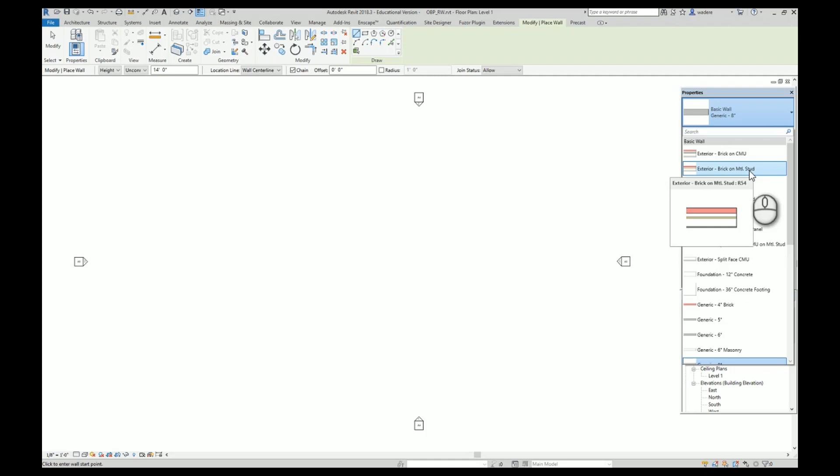The next one is brick on metal stud. This is probably the wall that most of you want to start with, unless you plan on doing some type of metal paneling or something like that on the exterior. In either case, as long as you pick an exterior wall to start with, we can adjust what the exterior finish is at a later time.

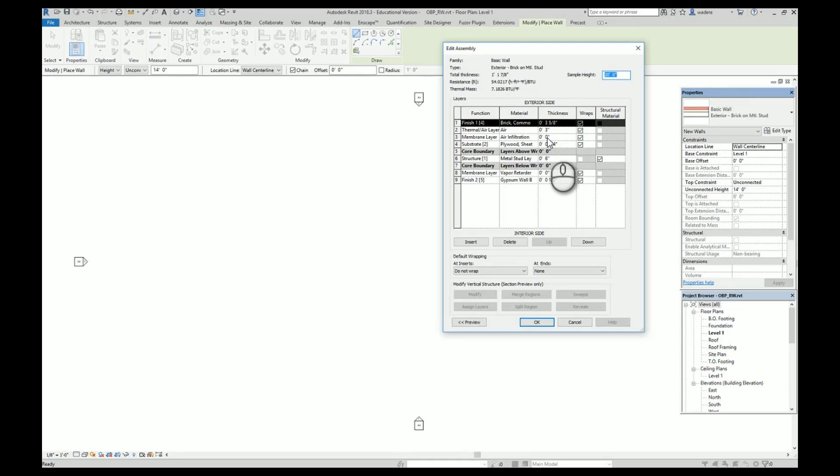So let's look at the construction of this wall. If we go into it and hit structure, you can see that we have brick on the outside, that's 3 5/8. We have an air barrier of 3 inches. We have our membrane layer, the air infiltration, which does not show any thickness because it's a very, very thin sheet of material. Then we have our sheathing, our exterior sheathing. This one in this case is plywood.

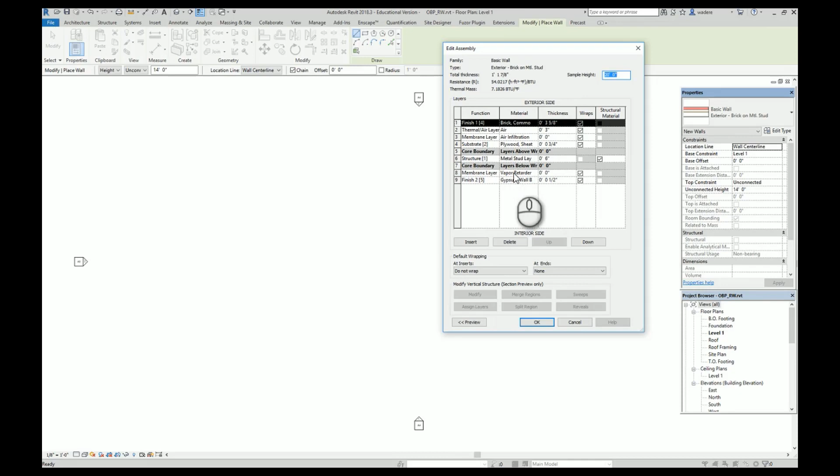It could be some type of a gypsum board, just as long as it's an exterior rated material. And then you'll see the actual structural component of the wall, which is the 6-inch metal stud, which is what we want. You'll notice it has a core boundary on each side. This is just part of the way that the wall is set up. The core boundary is typically on each side of the structural component of the wall.

And then to the interior, we have a vapor retarder, which basically is a sheet of plastic. Again, it's very, very thin, so it does not show any thickness here. And then on the gypsum wall board, in this case it has 1/2 inch. In most cases, we typically in commercial construction always use 5/8 inch.

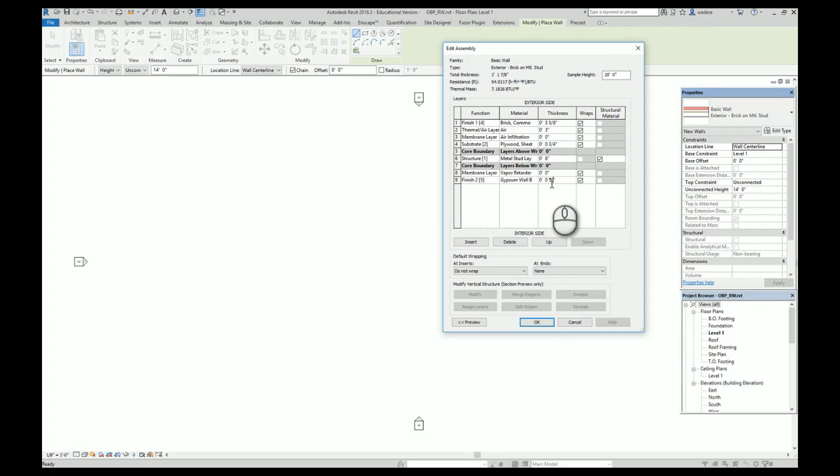So I'm going to go ahead and change that so that it is the correct wall type. And you'll notice when I did that, it actually changed the total thickness of the wall. And I'm going to say okay.

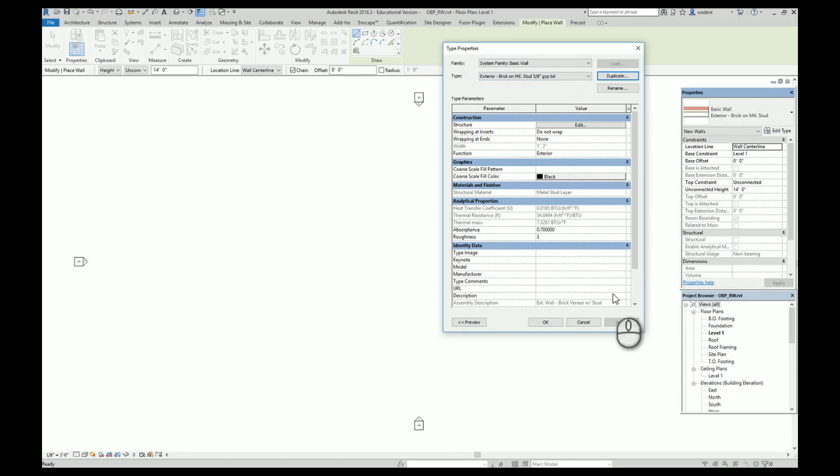And then I want to duplicate this or go back to that original wall type. So I'm going to do this by adding 5/8 inch gypsum board on there so that I know that that is the wall that I changed. And I'm going to say okay. You can see the name has changed. And I'm going to say okay.

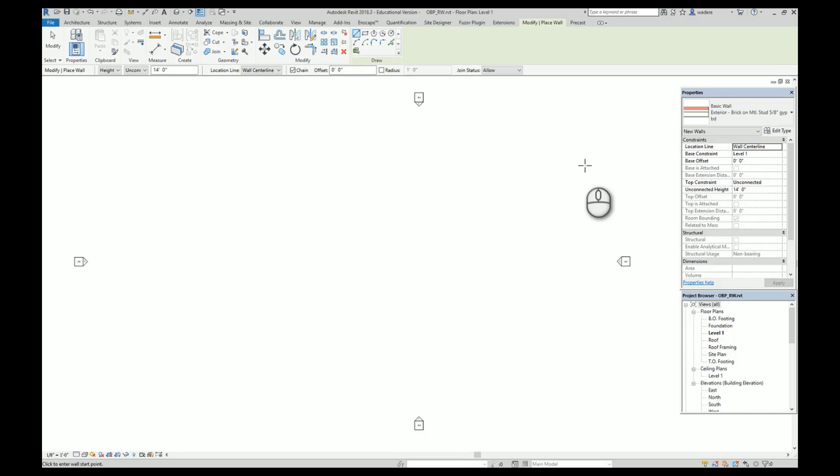I do want to caution you not to use a generic wall. In my courses, I don't allow you to use generic walls. Even though you may think generic wall is okay to start with, please don't use one. Once you decide on your exterior wall, I can help you create it. If it's something different, we can always go back and change it.

The next part before we begin to draw is you do need to set up a structural grid system. You are going to use a W12 by 53. I have set up some requirements as far as the spacing, and this is a little bit flexible. I have set up a maximum column spacing of 30 feet and a minimum column spacing of 15 feet.

What I want to see is equal spacings throughout most of it. What we try to do is keep all of our structural members the same sizes. It makes it much simpler to construct. It makes it more economical to be able to do that. So once you start laying out the building, you want to make sure that you set that up correctly.

As you are laying out your grid system, you need to make sure that it has good dimensions. And what I mean by good dimensions is it's nice if it can be rounded to like feet, like 20 feet, 21 feet, 22 feet.

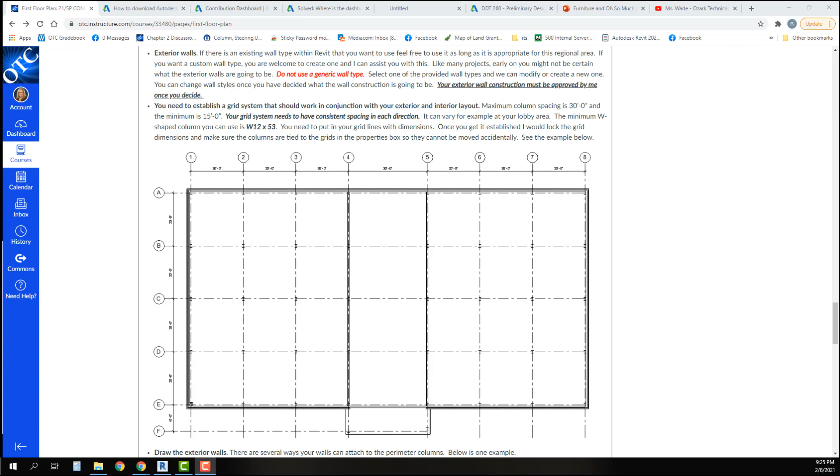But especially if you can't do that, make sure it's at least a full inch. Don't do 21 feet, 1.5 inches. You want to be very consistent and you want to have good numbers.

So we know the building itself from our original project has some certain dimensions. I've shown an example here in the assignment of one way to lay it out. You'll notice that my column spacing is 20 feet, 20 feet, 20 feet, and then I actually have 30 feet for my core. Then I have 20 feet, 20 feet, 20 feet. And then I have 20 feet here, and then I have 10 foot for my vestibule.

I would also need some sort of a vestibule here at the back of the building. It could be inside, it could be outside. So it might be simplest if you kind of know the basic dimensions of your building to lay out your grid system first.

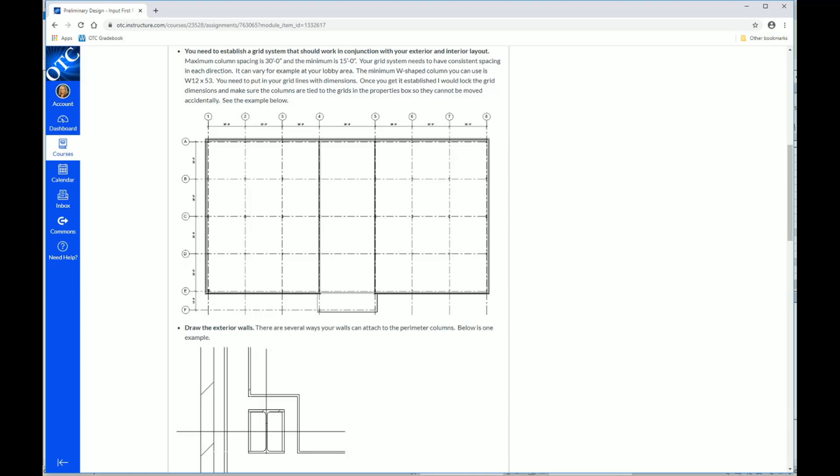So how we would go about doing that is if I go to my structure tab and I go to column, you'll see that over here I have some columns in here, okay, but I may not have the one that I want. So in this case I've asked you to use a 12 by 53.

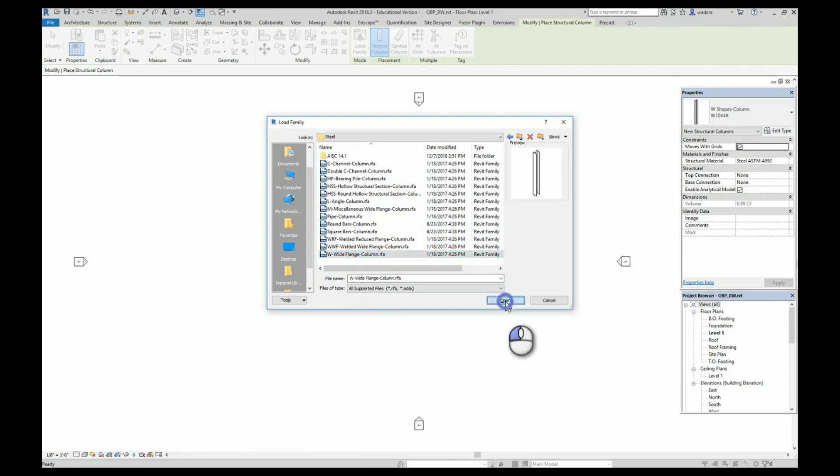So I'm going to go to load family, and I'm going to scroll down to structural columns, and I'm going to go with steel, and I'm going to do the wide flange column at the bottom, and I'm going to say open. And then you see it's going to give me all of my choices. They are in numerical order with the first part of it, and I wanted a 12 by 53. So if I come down here and pick on that and say OK, now I have my column.

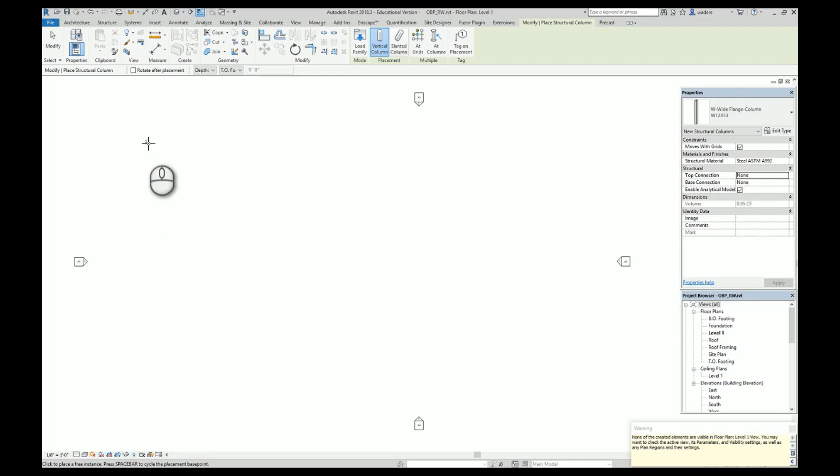I'm just going to place one to begin with. Now you'll notice it does not show up. If I go to my 3D view...

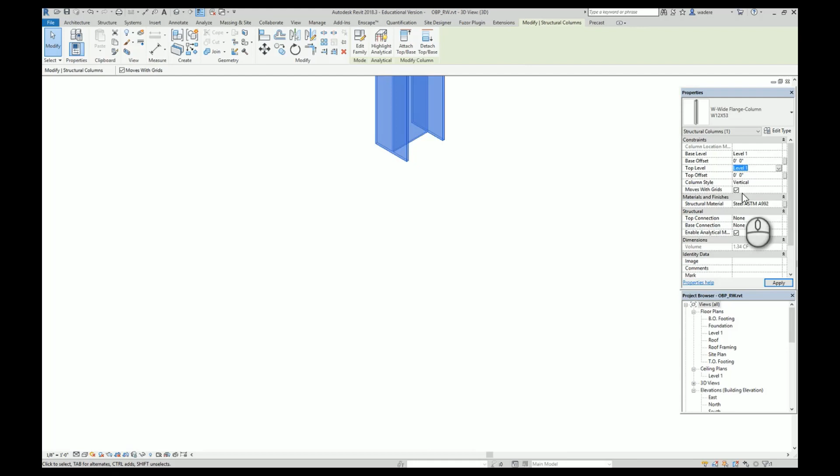There is my column. I'm going to click on that column, and I'm going to set the base level, and I apologize, my little notes are off on my other screen. I am going to set my base level to level 1, and I'm going to set the top level to roof, and I'm going to hit apply. Now if I go back to my level 1 plan, I can now see my column.

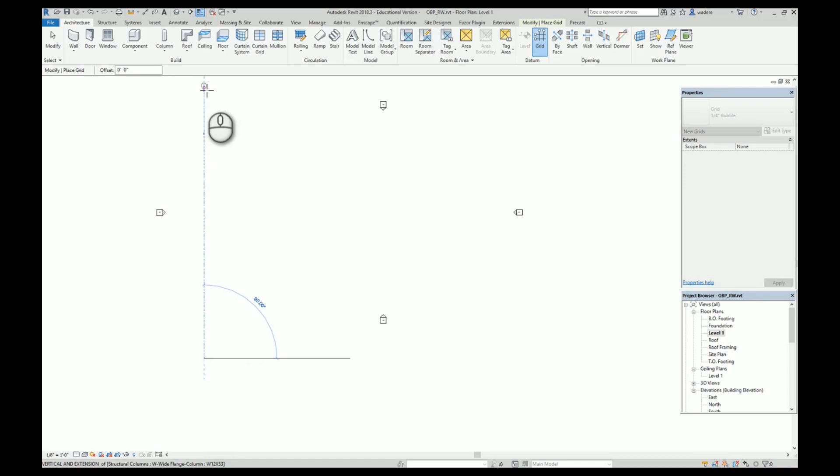What I'm going to do at this point is I'm going to go ahead and start with my grid. I'm going to go to my grids, and I'm going to align this with that first column, and I'm going to bring that up.

And then I'm going to do another grid from the bottom and come over 20 feet and go up. Do another grid 20 feet and go up, and do one more grid at 20 feet and go up. Then I'm going to do one at 30 feet because this is going to be my lobby and core area.

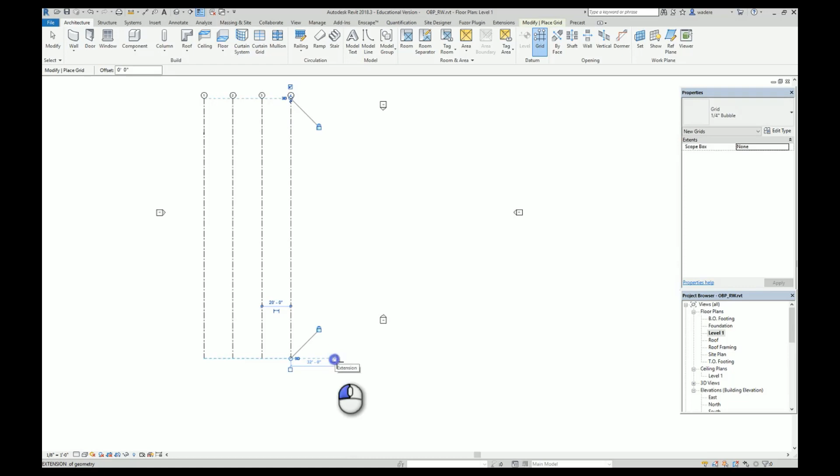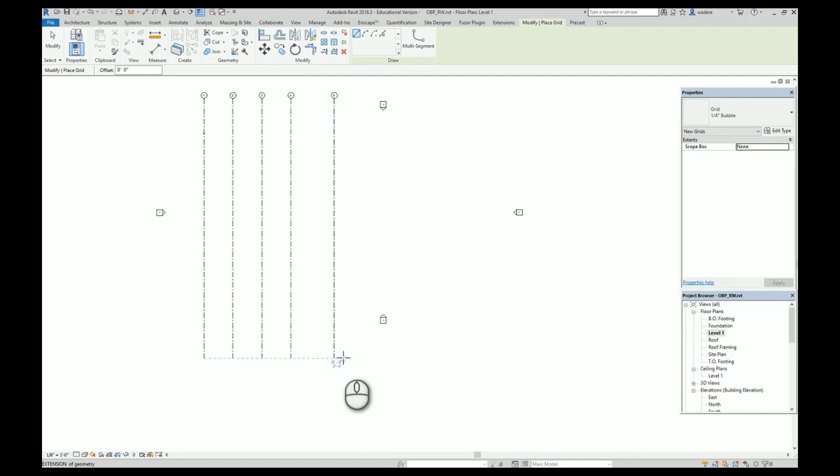So I can adjust this by just clicking on that grid and changing this to 30 feet. And then I'm going to continue by adding my other grids at 20 feet. And then adding the other grid at 20 feet. And then adding another grid at 20 feet.

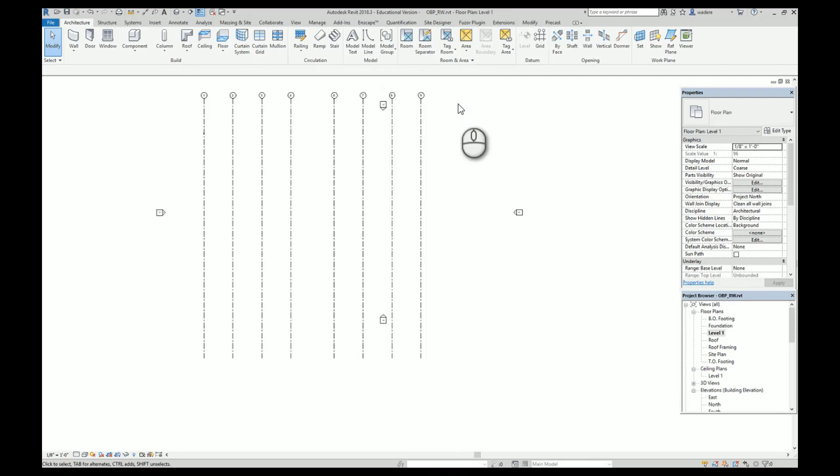So now it will make it much easier for me to lay out my columns. So I need to go in the other direction. So again, I'm going to add my grid, and I'm going to come off of that column, and I'm going to go this direction.

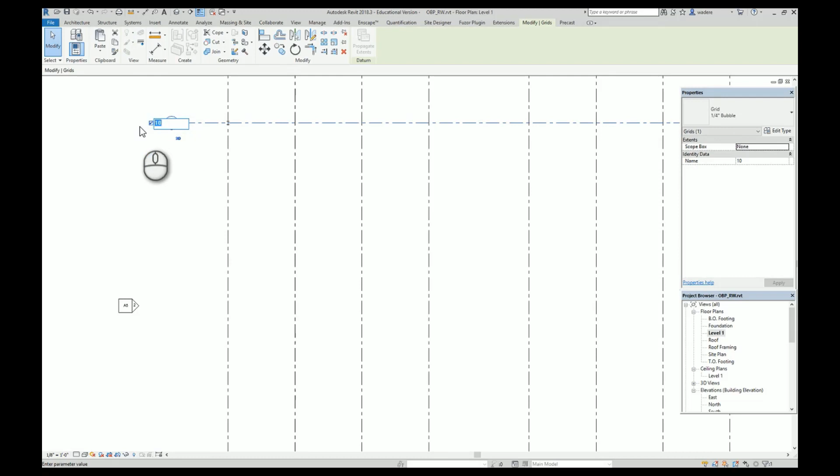And the first thing I'm going to do is I'm going to change this to an A, because I want to go A, B, C, D, that direction. So I'm going to go ahead and continue to add these at 20 feet. And again, I can get my alignment lines.

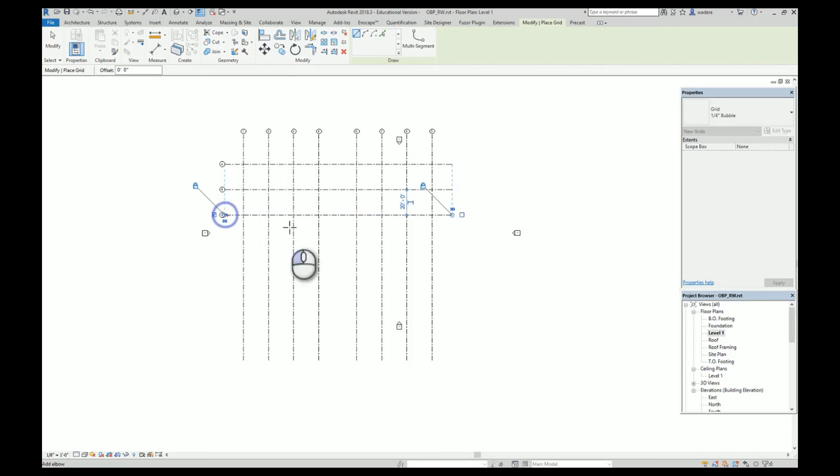I suggest that you do not copy grid lines. Revit doesn't like that. It doesn't like to work very well that way.

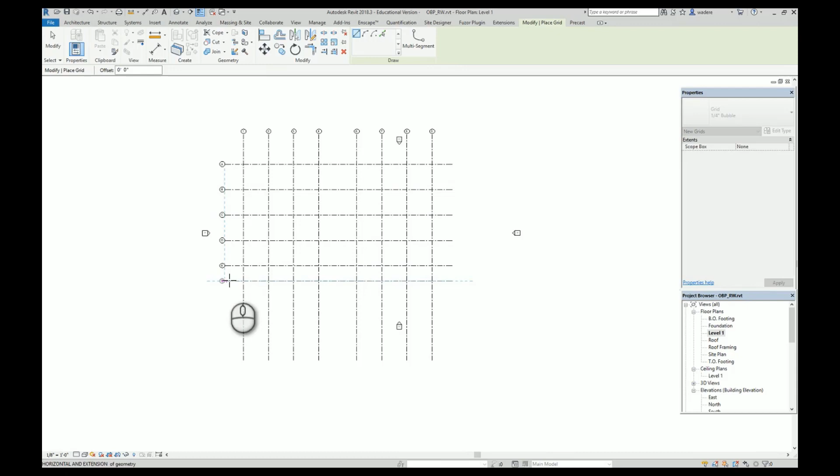And then I'm going to do one at 10 feet for my vestibule. Actually, I'm going to do 12 feet because that's what it's liking better.

Now I kind of have an idea of where the perimeter of my building is. So I want to grab these grid lines and pull them down below my elevation marker. If I don't do that, when I go to my elevation, I'm not going to see those grid lines, and I want that to happen.

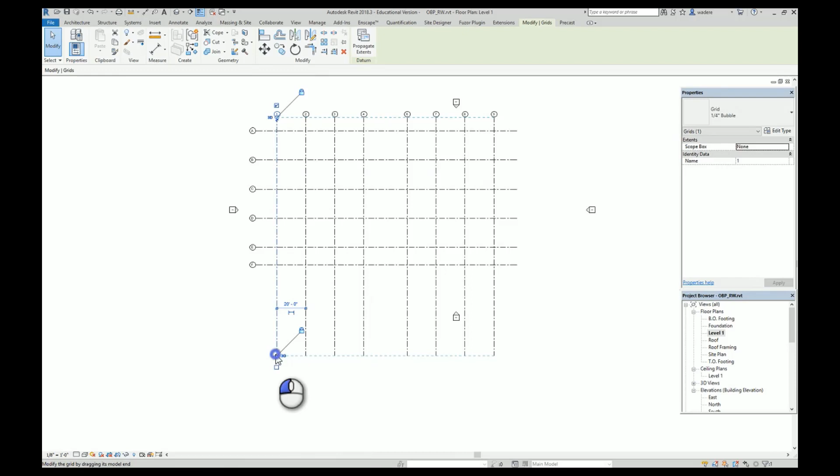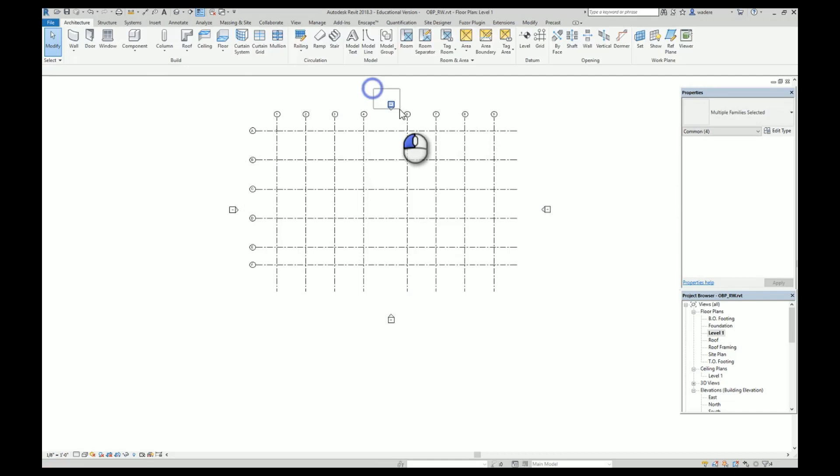This one again is pretty far out here. So if I just grab this little circle and pull it up, I can pull it up like that. And then this one, I'm going to move over closer. This one, hold down the control key, move these over more in the middle, and that way I have all of my grids covered. So now what I can do is I can place the rest of my columns very easily.

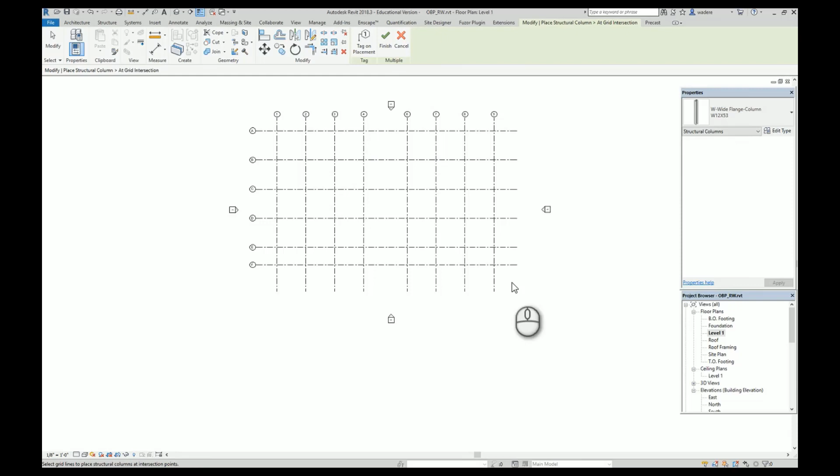Right here, I have something that says at grids. So the first thing I'm going to do is remove that column that I put in. And I'm going to do my column at grids. Again, I've already got my 12 by 53 selected. So if I just window on all of my grids and click on the check mark, you'll see it placed all of my columns.

I get a warning down here because it says it can't see them. And again, I need to go back to here, to my 3D view.

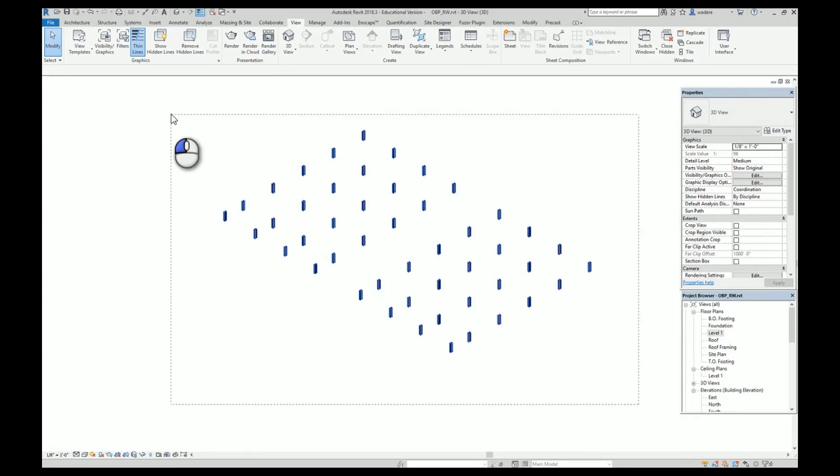And I'm going to zoom out and select all of my columns. I'm going to set the top level to roof. Again, I apologize, my little box is off on my other screen. And I'm going to set the base level to level 1.

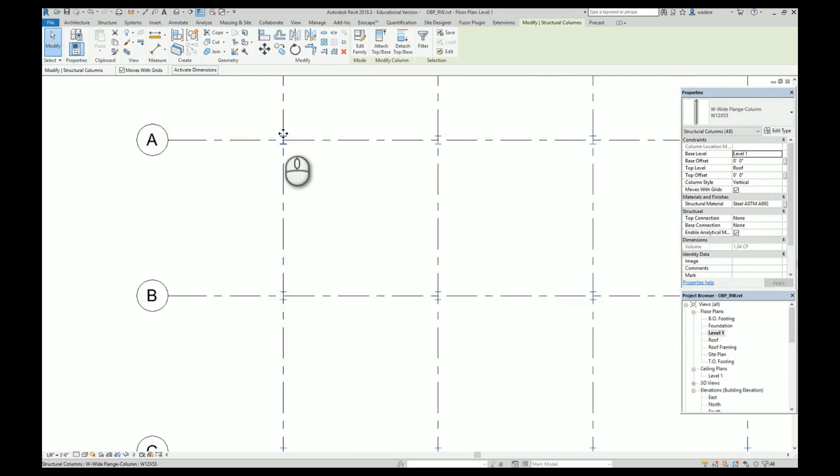So now when I go back to my level 1 plan, I should be able to see all of my columns. Now again, it's important, I feel, that down here at the bottom you set your setting to fine so that you can see the actual thicknesses of everything. It makes it much, much easier to work with.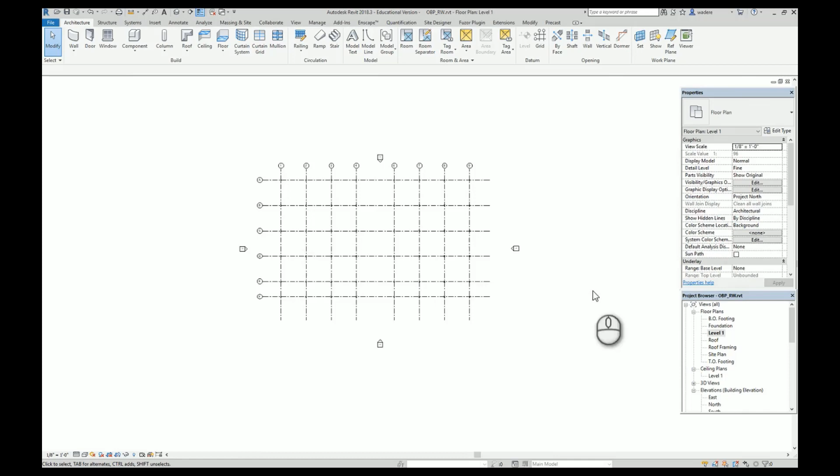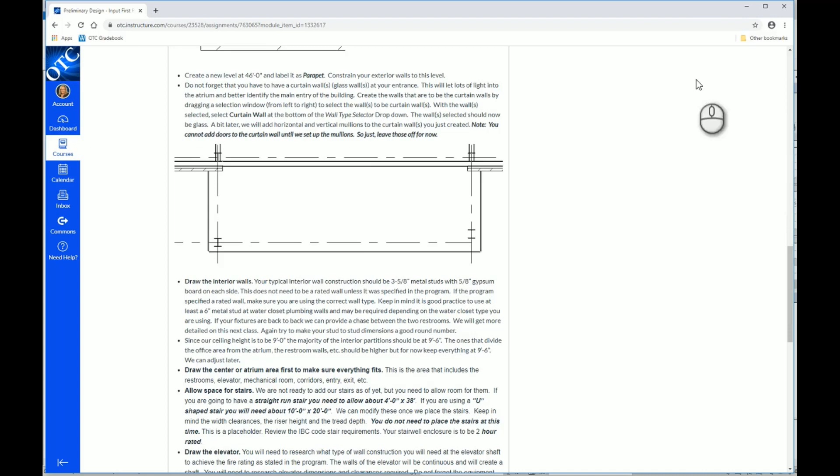Now that I have my grids in place and my columns in place, I can start putting in my exterior walls. One thing that I want to do is, if you read through the assignment here, I've asked you to create a new level called parapet, because we want our exterior walls to go to the parapet. If you're not familiar with what a parapet is, you need to look that up.

A parapet is basically a fake wall that comes up above the roof. It helps to hide stuff that's on the roof. It also keeps people from falling off of the roof. If you don't have that, in most cases you have to have some sort of fencing. So a parapet is something that you will have on your building, because more than likely you will have a flat roof. I want your parapet to be at least 4 feet above your roof line.

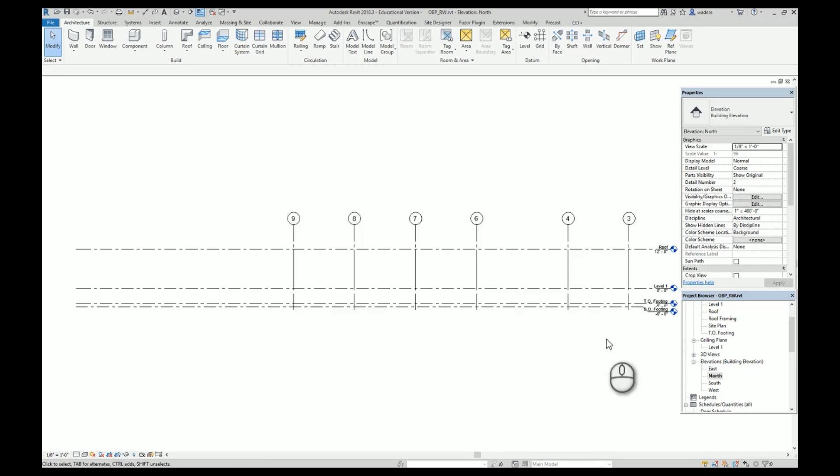So we're going to go into our elevation. And I just picked the north one, and right now you see you have a footing and a bottom of footing. We are not going to do footings on this project. So if you want to select those and hit delete, those will be deleted. You'll notice they also deleted out of your floor plans.

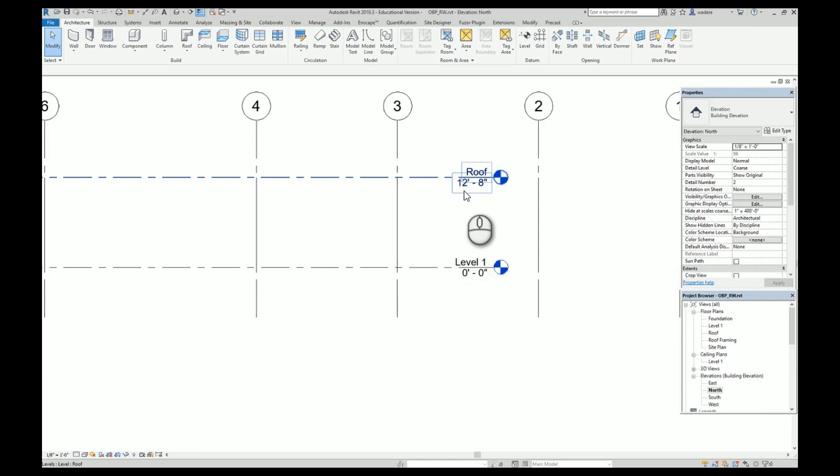I want you to change your roof height to be 42 feet.

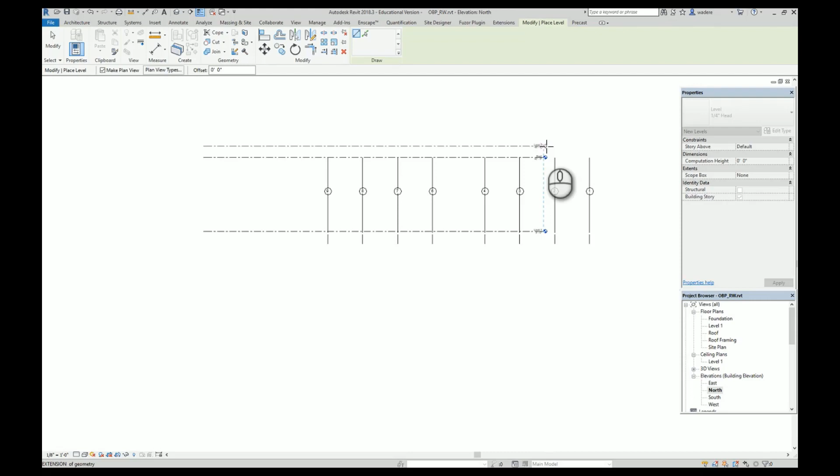Then we need to add another level, and we can do that under the Architecture tab. We're going to go up about 4 feet. I'm not going to worry about that. I'm just going to get it on there, and then I can come back in and change it. I'm going to call this parapet, and I want it to be at 46 feet.

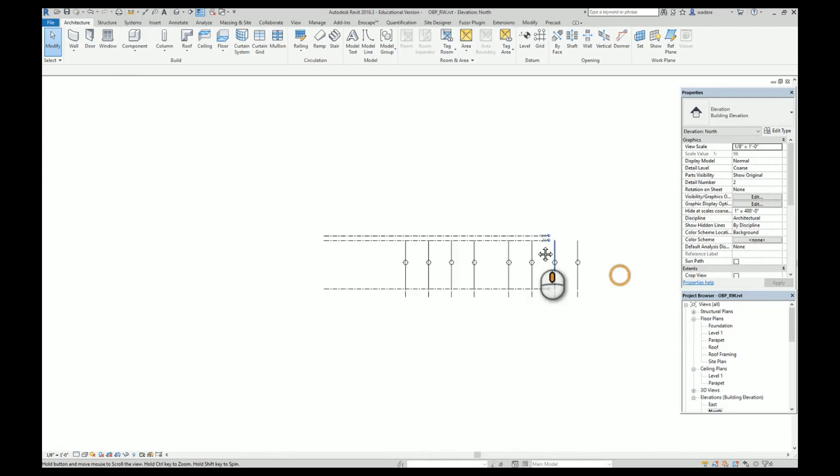Now, a couple of things I need to do. You can see my level lines are outside of my grid lines. So if I take these and just move them over, okay, and then I want to take my grid line and move it up past my building so that I have something that looks like that.

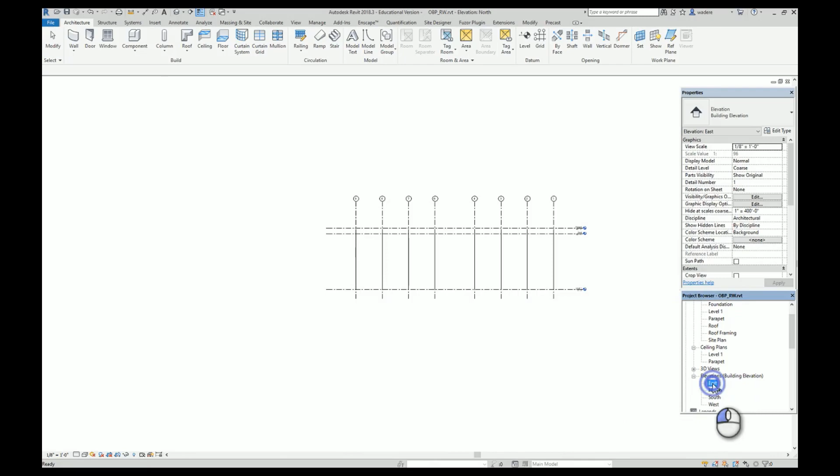And I will need to do that on each of my elevations. So again, I just click on this grid line and grab the bubble and pull it up. And in this case, I'm far enough outside my building over here. I don't need to make any adjustments. Go to my south.

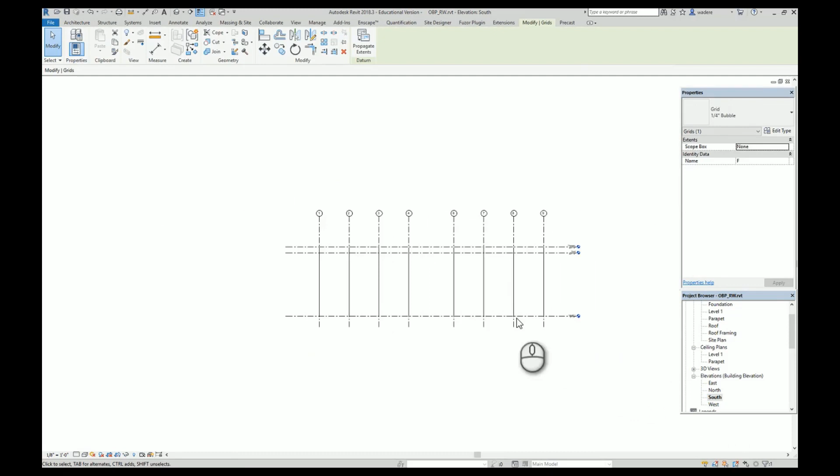This one is fine, the way that it is set up. And then go to my west—these are fine the way they are set up. So now I'm ready to go back to my level 1 plan.

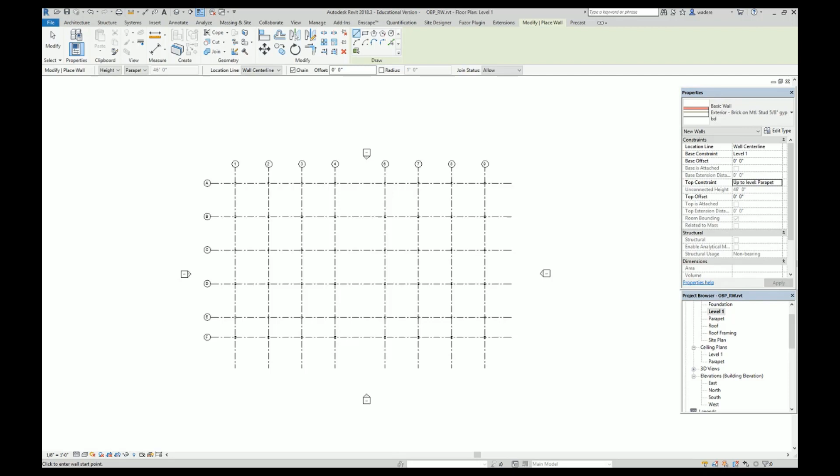I'm ready to start putting in my perimeter walls. I want to go to my wall, Architecture, and use the one that I created, with the base constraint at level 1 and the top constraint at the parapet. This way my perimeter wall goes all the way up. For right now, I'm just going to sketch my wall in, going to the right. If I go to the left, it puts my brick on the inside; if I go to the right, it puts my brick on the outside. So for now, I'm just going to draw the box in for my building.

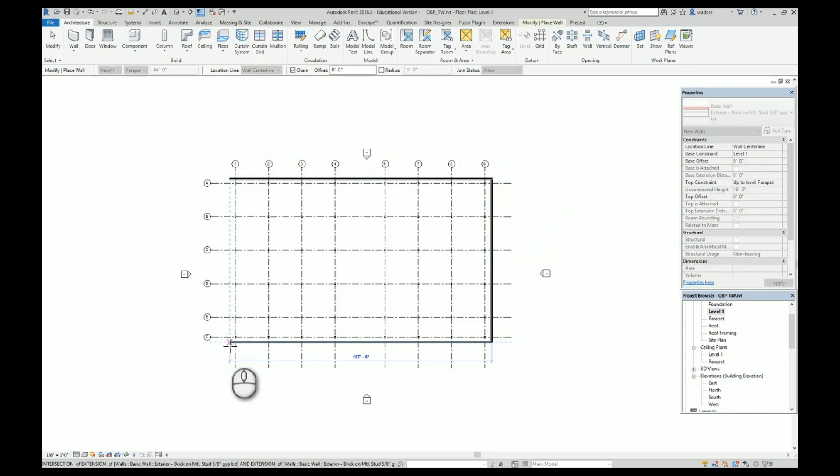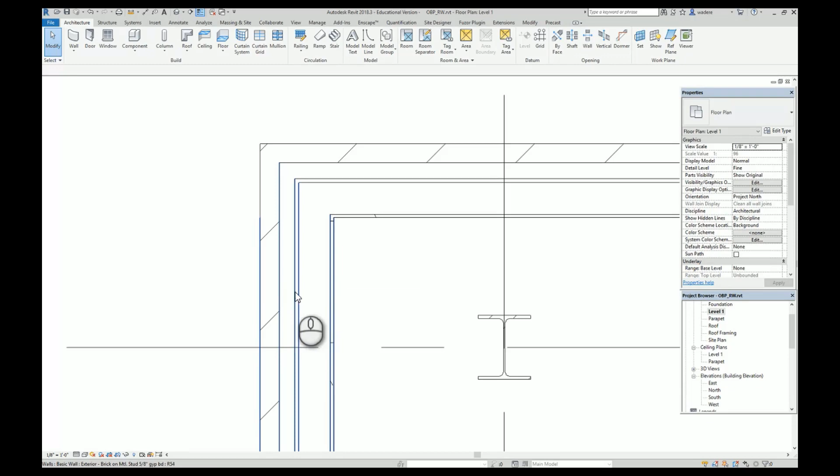If I zoom in, I can see all of the different components of my wall. This is my gypsum board, the 5/8 inch gypsum board. This area here is my 6 inch metal stud. This is my exterior sheathing. This is my 3 inch airspace, and this is my brick.

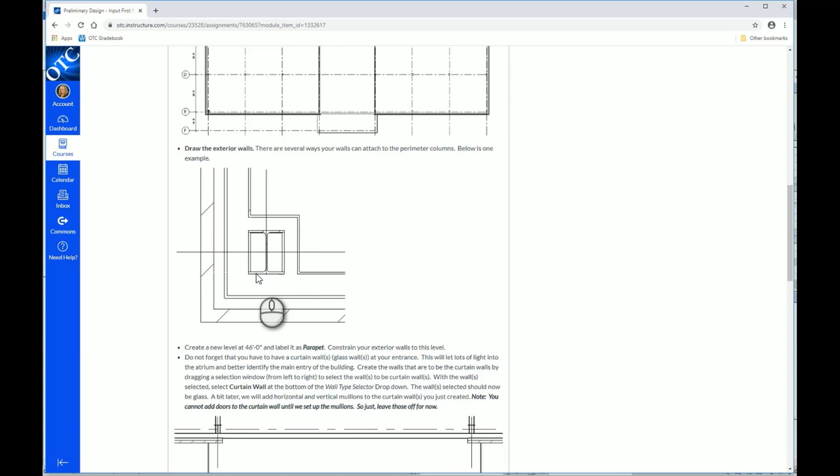How I want this to work with my columns is, if you look on the assignment, I want my column to fit against the stud. I'm not going to make you change the exterior wall at this point and take out this piece of gypsum board, because it would not in reality be there, but we're just going to butt our wall up to the columns themselves. So I can use my align tool.

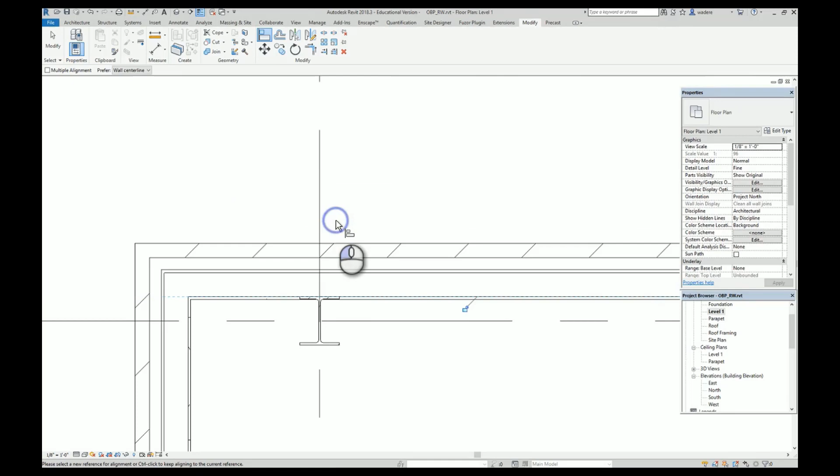If I go to modify and hit align, I pick what I want to align to first—so I'm going to pick this side of my column. Then when I come up here and get close to the line I want, if I hit the tab key, it will take that wall and move it. I'm going to do the same thing here: pick the very end of this column, then come over here, hit my tab key, and move that wall in.

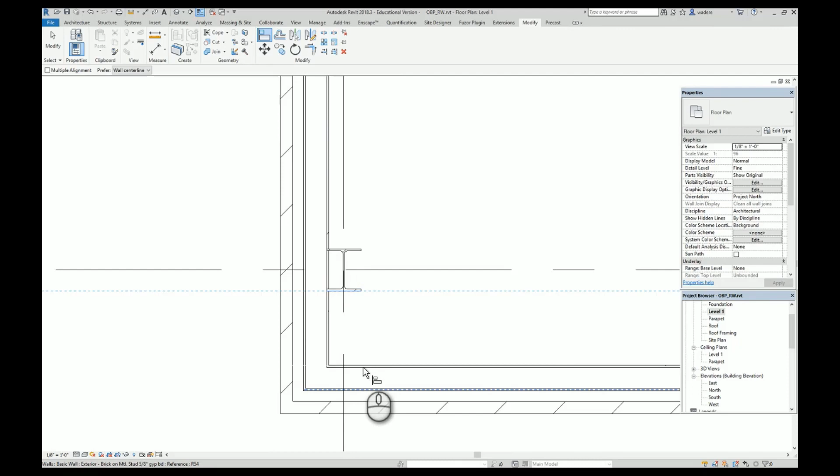I'm going to do the same thing down here—do align, pick that side of the column, and hit my tab key to get this side of the wall and align it that way. Then I'm going to come over here and do the same thing, and this one should be aligned at the top. So I have that fixed very nicely.

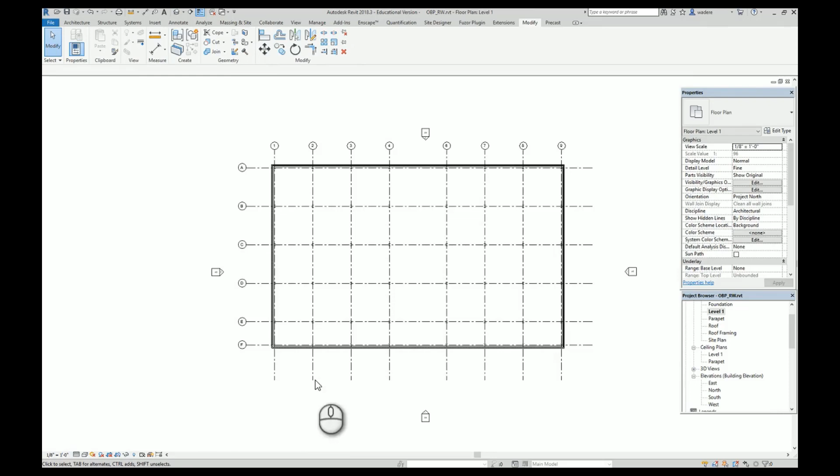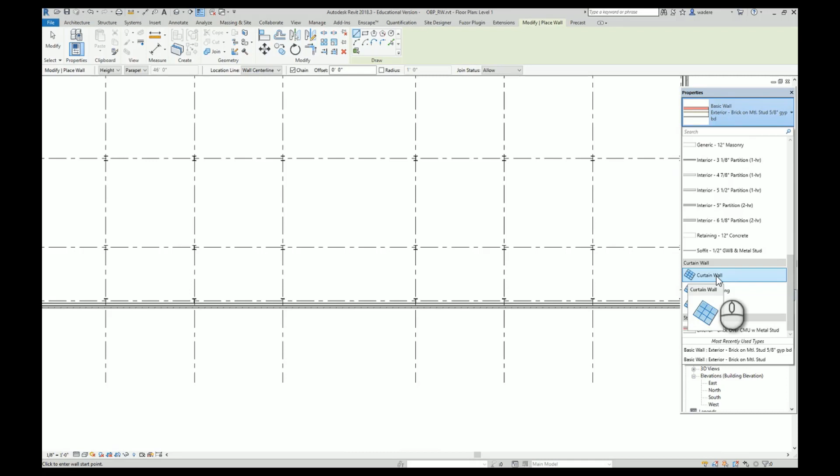Now, this area out in front for my vestibule is going to be my curtain wall area. You will be required to have a curtain wall in your building. So if you go to Architecture and go to Wall, Architectural, and scroll down, you will see Curtain Wall. For now—and I can adjust this later—I want it to go up to my parapet.

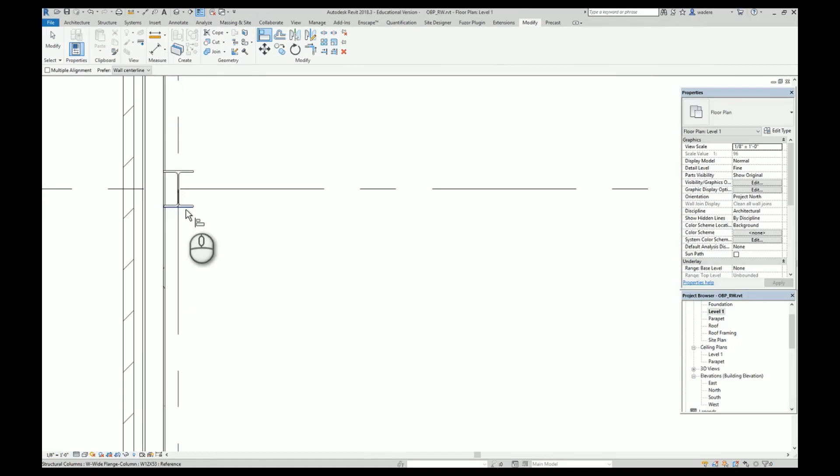I'm going to place it, but I did make an error—I need to move this exterior wall up. So I'm going to do that now using my align tool, and put that wall there. And since I do not need these columns out here, I'm going to delete them.

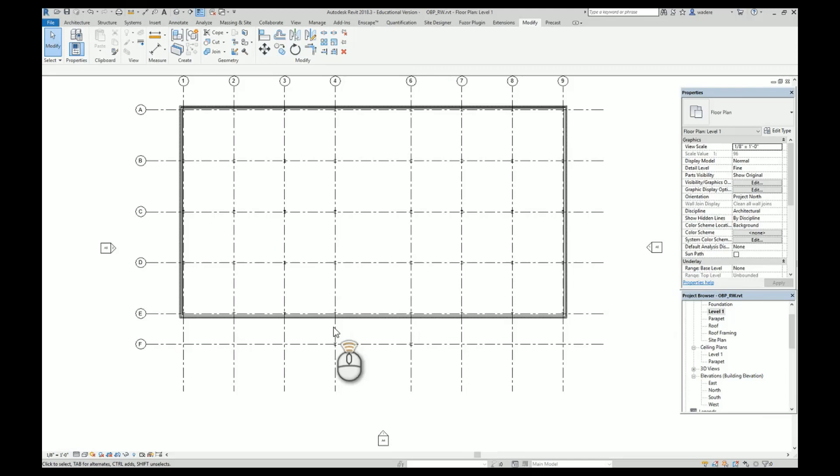I'm now going to place my curtain wall. For now, I'm just going to place it something like this. But once I get my mullions placed, I can adjust this, so I'm not going to worry about this too much.

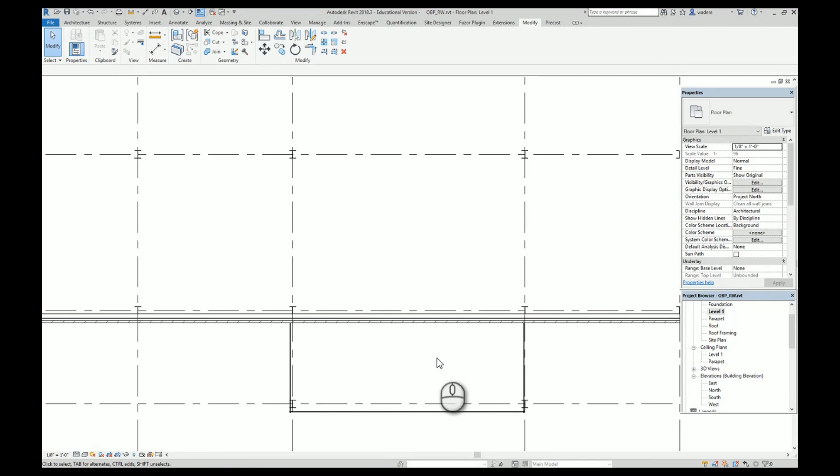I am going to break this wall in between here, because this is going to be the area I can look down into from my other floors. So I'm going to use my modify tool and use split to break this wall, then delete this section out. I'll make adjustments here on how I want this to work once I get to that point.

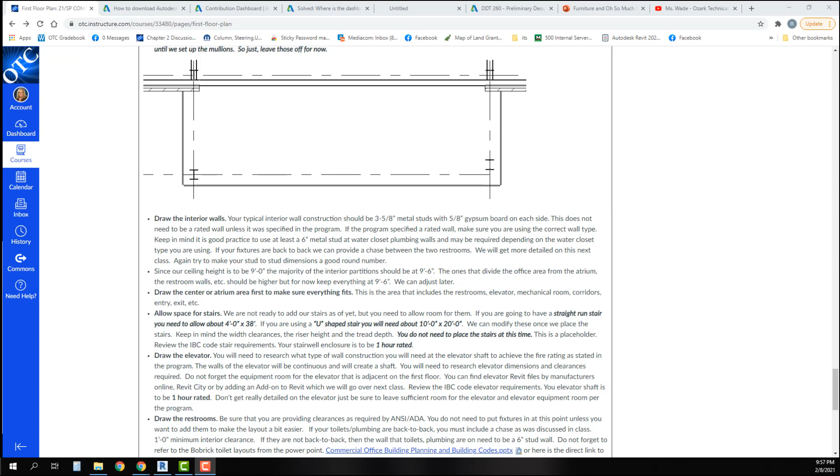That concludes the exterior walls and the grid system. Next, we will talk about the interior walls.